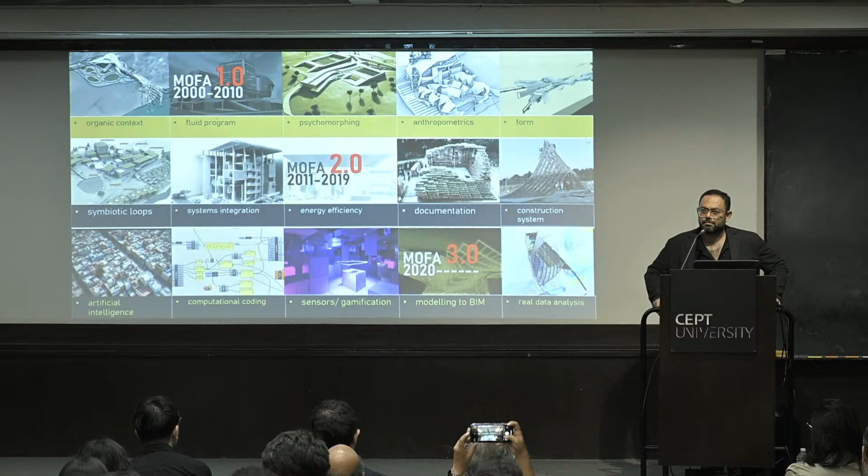So, shaping design futures, digital workflows in architecture and construction, which to me goes hand in hand. Our practice, which is about 20 years old now, has gone through various versions, and each version has helped us understand the way forward for the future. Practice is always work in progress for me — it's an experimental lab where we keep a fine balance between how to run a practice versus what we find for the future as a language for ourselves. So it's sort of a disruptive practice. I believe in controlled chaos, and that is something one is trying to learn over the last 20 years.

So when I come to a general overview of the design time period — and these are important for me — when I say medieval versus industrial to digital and to AI, what I mean is medieval to me was more community and craft oriented. It was not based on formal education as we understand it today. It was built on master craftsmen and other craftsmen, other industries put together. It was not the architect, engineer, and builder as we understand today, but a more organic, fluid system of cultural continuity of collective knowledge and craftsmanship.

It was more of oral transmission and hands-on building — something not always drawn on paper, not always engineered on computers, but a more collective knowledge used to build or craft something. The space belonged to the community. It was symbolic, it was contextual, it was deeply embedded in vernacular wisdom.

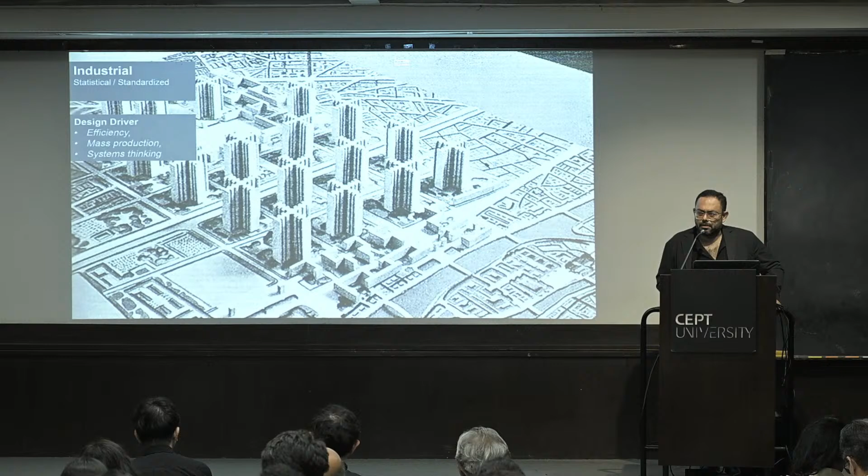Now, I'm not saying one is better than the other, but with time, things change, and there's a need to change at that time. With the Industrial Revolution, and going on from industrial to postmodern architecture, or even to post-war architecture, there was a need for efficiency, a need for mass production and systems thinking. The new terms of an architect, engineer, structural engineer, and builder came into the picture. And when you have to direct a language, when you have to create a mass-produced city, you need modularization, you need typology, you need standard dimensions, and you need to be able to draw things.

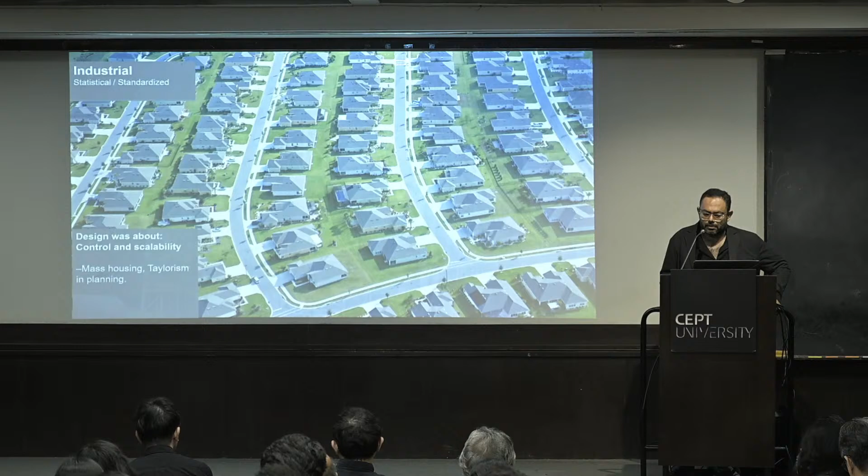The design was about control and scalability because numbers mattered — it had to be scaled up. Cities were getting filled. You read Hard Times by Charles Dickens, you read anything about the industrial era, you had to fill the numbers of the city, and the craft-oriented approach did not work anymore. So mass housing and Taylorism in planning was extremely important — it was the need of the hour.

With the 80s came the digital era, and we call it the behavioral or cognitive era, where the design driver was more user-centric. By the time people were tired of the cookie-cutter approach, there were new disruptive thinkings. The computer — and I'm not talking right now about parametric versus non-parametric, I'm talking only about CAD or machines being introduced, the digital era at its start — by the time it progressed, it started talking about user-centered design, interactivity, and feedback loops. Something that you learn, something that you don't.

It's not the mastermind of one architect or engineer, but it's a more collaborative process. You have continuous feedback loops, you understand what works and what doesn't work, and the term parametric came in.

But it's not that parametricism was not there in medieval times. It was there. This is where I differ from the conventional term of what parametric design is. Everybody understands parametric design as introduced after the digital age. But anything based on parameters, on a certain proportioning system, and non-cookie cutter, can be called parametric. There have been enough examples in medieval architecture of parametric design which is non-digital.

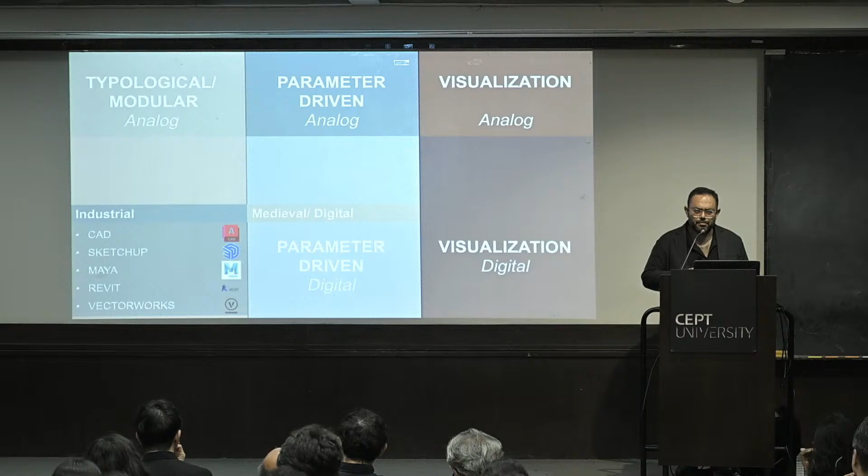So this is the broad-based understanding I have tried to form. When it comes to design, there's a parametric or parameter-driven design, and there's a modular design—something more intuitive, not based on feedbacks, not based on parameters, and both exist in the analog and digital world. Of course, in the digital world, there are various softwares that lead you to these kinds of things, and various kinds of visualization.

But in the non-parametric sense, there's a general timeline that I have understood through my own practice and the projects which have been done. It starts with—and I've taken only one project in particular right now—the Bilbao Guggenheim, because it sparked off a new way of thinking.

We call it the Bilbao effect. Frank Gehry brought in a new software, which has become Gehry Technologies, and it sparked off a new revolution or a new way of thinking. He was inspired by Picasso's painting.

He wanted to look at those cubist sort of things. There is one theory which says that the whole idea of titanium panels and the planes and things were an inspiration from a cubist painting of Picasso. There was a sketch,

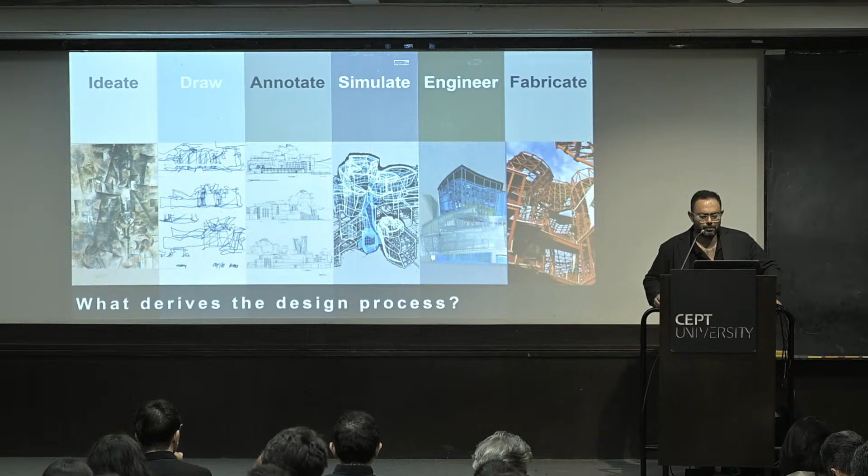annotation to that, the whole craft of building making—and I'm going to mention Mario Carpo here—he talks about the ability to make a certain building as the ability of an architect to annotate it. How well you can annotate that building defines the language of that building. So, simulation, engineering, and fabrication leads you to a certain kind of building.

Now, this example is extremely important. During one of his talks at Google, Mario Carpo mentions very clearly, and his references are very interesting—he refers to Gehry's architecture as fish, because it was the first time he wanted to build the fish. Dassault was approached.

You got CATIA. CATIA was brought down. It was very expensive in those days. Gehry Technologies invested, put together, and brought it down for more human use—for the use of architects, it became simpler.

And after that, as per Mario, he made multiple fish, because each form was a derivative from the same principle. It was just various types of fish. But with the digital age, with algorithmic thinking coming in, with data-driven design, he calls it the dog.

Why the dog? Because of the typology. It's not based on form, it's not based on shape. You don't know the shape in the beginning. It's a data-driven design, and with that, it could be anything. It becomes a more open-ended future. It's not an intuitive, form-based or idea-based design, but becomes a more exploratory design for the future, where even the designer does not know what they're designing.